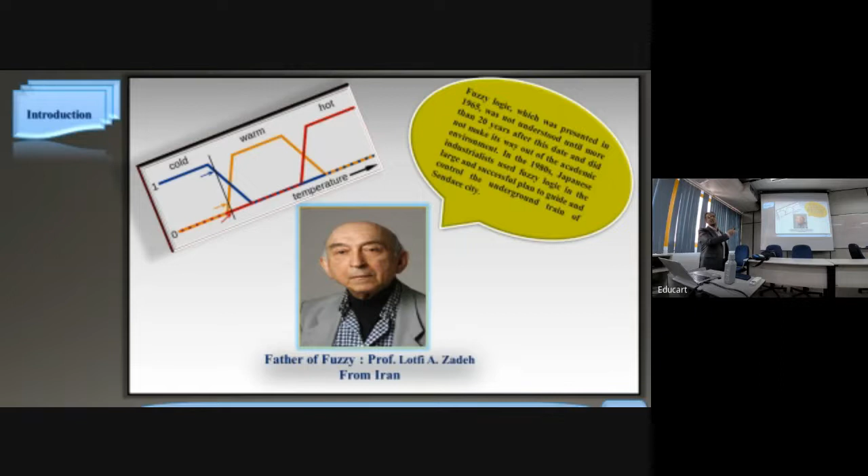Of course, nowadays fuzzy has developed - it goes to fuzzy type 2, fuzzy type 3, and they work with training algorithms. But this is the first background. If you don't have this background of what fuzzy is, you cannot go ahead.

If we want a simple introduction of fuzzy systems and why we are going to use adaptive fuzzy, it's important to understand why we left fuzzy, why we don't use fuzzy directly, and why we switch to adaptive fuzzy. What's the reason?

If you look at the history of fuzzy, in 1990 successful application of fuzzy logic increased in automated control. This was the first period that a revolution happened in intelligent controllers, because before that time all controllers were classic control, like sliding mode, backstepping, PI and PID. PI and PID still work in industry.

They have a lot of problems and people support them. But if we go through the details and consider nonlinear things, making the system linear and trying to design a controller nowadays is not useful because there are a lot of nonlinear terms in your loop that you ignore if you want to design a linear system.

So it's not fair. Some researchers just defend PI and PID because it's easy to design and cheap to implement. But you ignore many things, and after designing the controller, these nonlinear terms that you ignore can make a problem for you. That's why we are switching to nonlinear.

From 1990, especially that time, devices and industrial equipment became complicated in terms of mathematics. If you look at the models of new devices, they are highly complicated. That's why we are looking for adaptive methods.

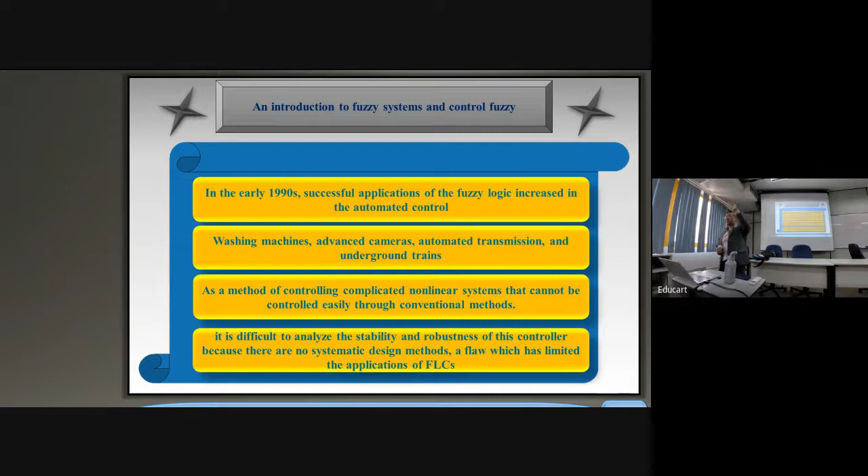The problem with fuzzy is that it doesn't have a mathematics background, so we cannot always prove stability if you use pure fuzzy. Because if we define pure fuzzy, you need to manually design the membership function, and training this membership function is important. So this is the problem of fuzzy: you cannot prove stability with pure fuzzy. That's why we mix it with adaptive to become adaptive fuzzy control.

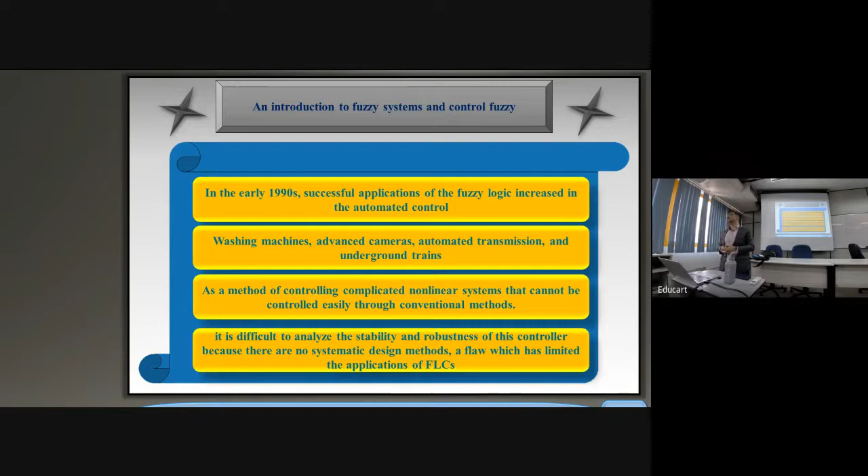Of course, fuzzy has other applications like classification. We can classify different things. We can design an observer, we can design a controller, we can design an estimator, and each one has its own application.

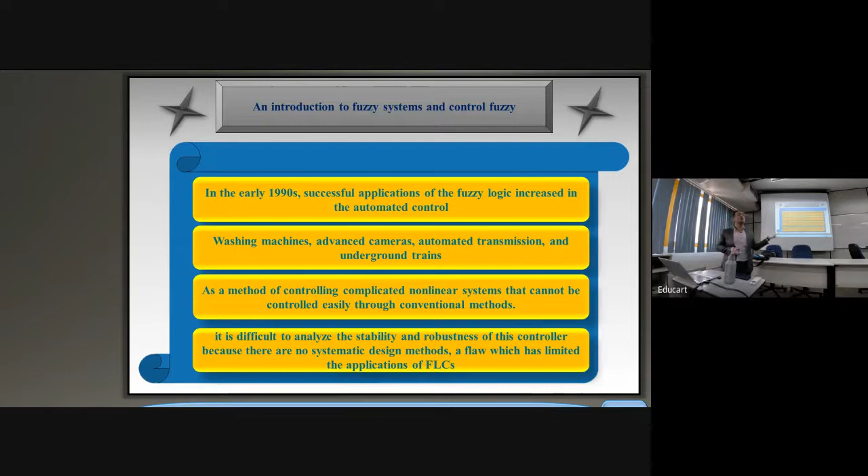But the main reason we switch from fuzzy to adaptive fuzzy in controllers or observers is to prove stability. When you design your controller, you need to prove the closed loop system is stable, and we have different types of stability, not just one type.

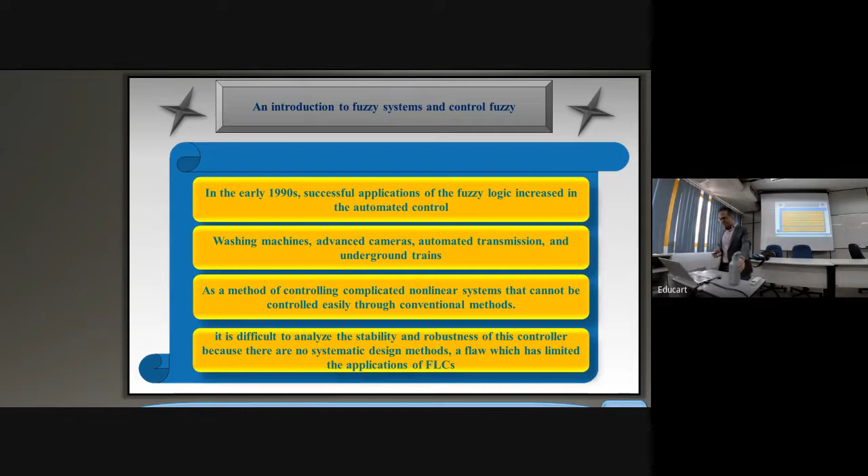This is the reason I first introduce adaptive control. You know adaptive control developed after World War II. Maybe during the war, adaptive control became silent among researchers because of politics, I don't know, but after that it tried to develop fast.

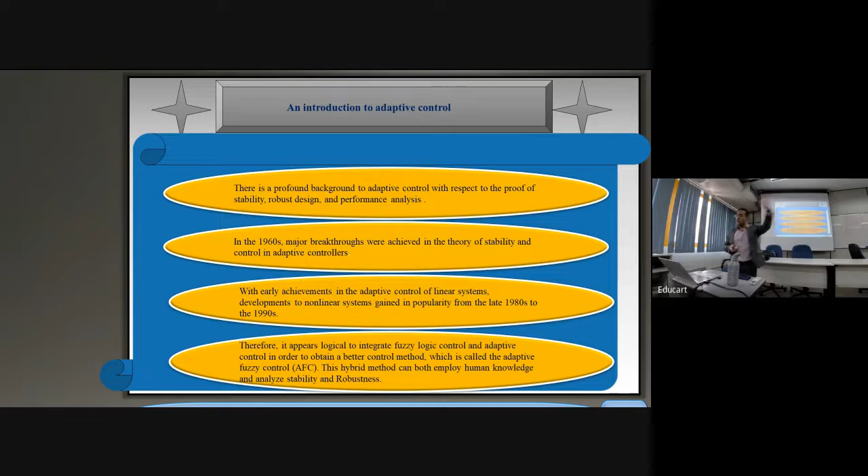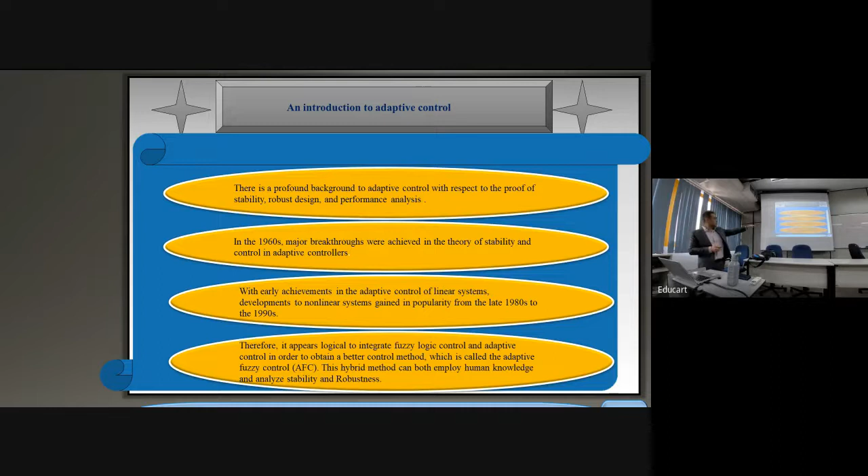Many papers came from Russia, from America, different countries, Brazil. They tried to develop adaptive control fast, especially in 1990. And we mix fuzzy control with adaptive control, calling it adaptive fuzzy, to have the properties of fuzzy to solve

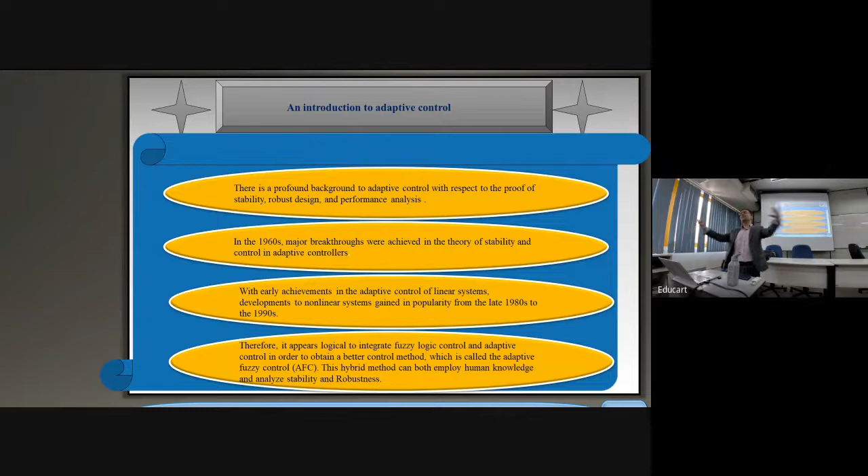complicated systems that we cannot control by classical methods, and also use the stability that comes from adaptive, mixing them together and calling it adaptive fuzzy. So these are the main properties of adaptive fuzzy controllers: we can design a new controller for complicated systems, and we can prove their stability.

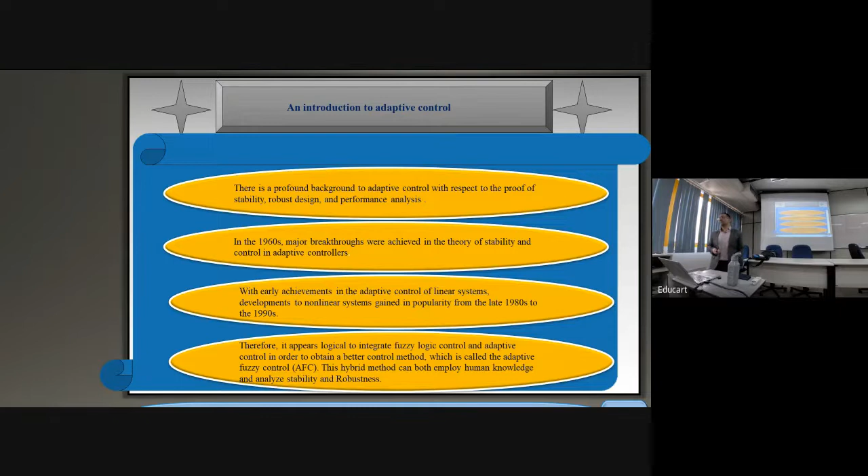According to the explanation for training the membership function of fuzzy that I discussed, we have many ways to do this. We can use neural networks, we can use Kalman filter, we can use different ways, we can use genetic algorithm to train these membership functions based on our system.

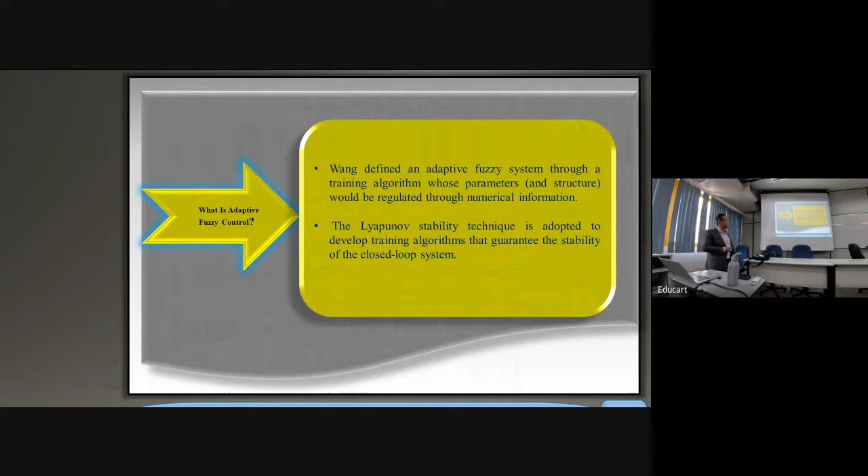As you know, Wang defined it. Wang was the first person to write a book about fuzzy control. We say an adaptive fuzzy system has a training algorithm whose parameters and structure are regulated through numerical information. By some information from the system that you have, you can train the fuzzy system, and after that you can prove its stability. So we call it adaptive fuzzy control.

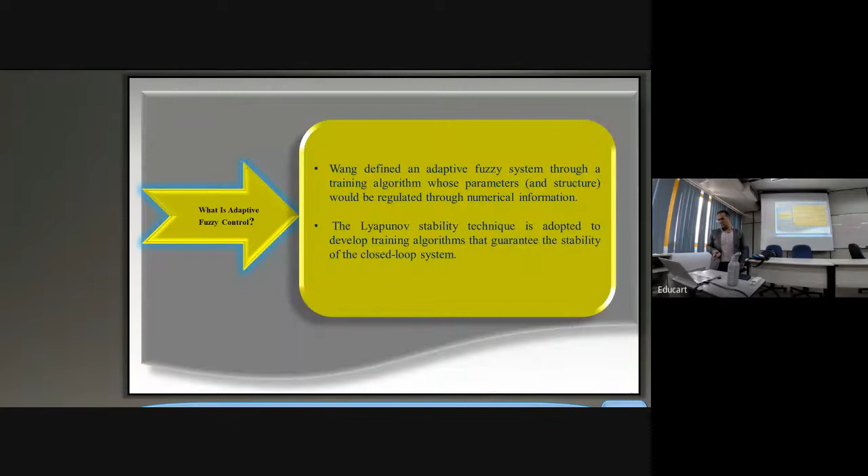So what are the properties of adaptive fuzzy control? First, adaptive fuzzy systems are good nonlinear general estimators. As I mentioned, many nonlinear systems cannot, or it's very difficult to, use classical control for.

For example, in the next slide, I will show you chaotic systems. Chaotic systems are very complicated. If you want to define them with sliding mode, it's impossible or difficult, and you have problems like chattering. Backstepping, when you go through the steps, it's very difficult. PI control, impossible, it can never do it.

So this is a very good nonlinear general estimator. Fuzzy control is easy to implement. This is another important part of fuzzy control, that we can implement a fuzzy controller, because with some other nonlinear controllers, when you design them, implementation is impossible or very expensive.

For example, why is PI and PID still working in some projects? Because they are cheap. When you want to implement a controller, it's cheap and easy. But why don't we switch practically from PI to sliding mode, or from PI to feedback linearization?

Because it's expensive to implement. There's a VLSI IC that can be designed for this complicated equation, but it's too expensive. That's why researchers, especially in industry where economics is very important, still work with PI and PID.

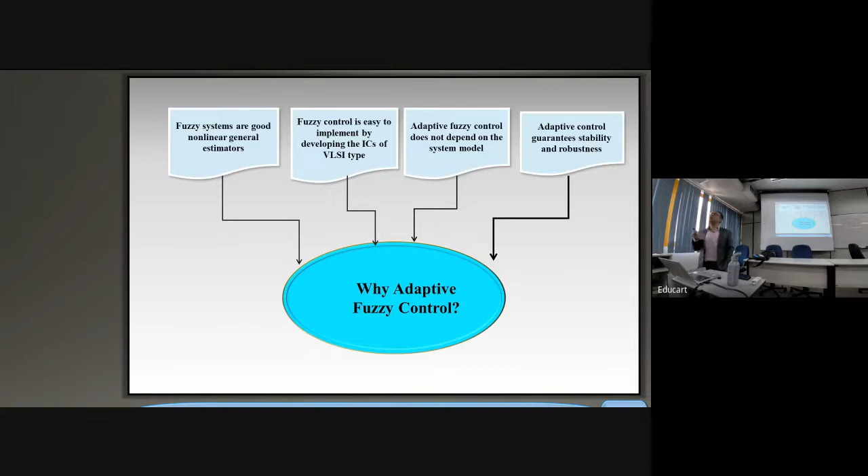If I want to classify adaptive fuzzy control, you can classify it into two parts: direct and indirect. What's the difference? Direct means you directly design the controller, for example a sliding mode adaptive fuzzy controller, directly designed by some algorithm or method. It has its own problems.

But what is indirect adaptive fuzzy control? First, you estimate the dynamics of the system, whether you know the dynamics or not. First you estimate it, then give it to another controller. So the controller design is based on the dynamics you estimated by fuzzy. We call it an adaptive fuzzy controller.

Most of my work is categorized in this part. I work with indirect adaptive fuzzy controllers because proving stability, sometimes finding the Lyapunov function, is difficult when you go with direct adaptive fuzzy control, and there are other issues. So if you see in a paper 'direct' and 'indirect', this is the difference between them.

Directly you use some algorithm and method, but indirect means first you estimate the model, then give it to another controller. The controller can be any controller because you have the exact model of the system.

The properties of this controller compared to classical ones: you don't need the exact model of the system. Because having the exact model is sometimes impossible. For example, an airplane moving, or a missile going into space. The model is difficult to estimate because, for example, as the missile goes into space, its mass is changing. But do you have a sensor to measure the mass? It's very expensive or impossible.

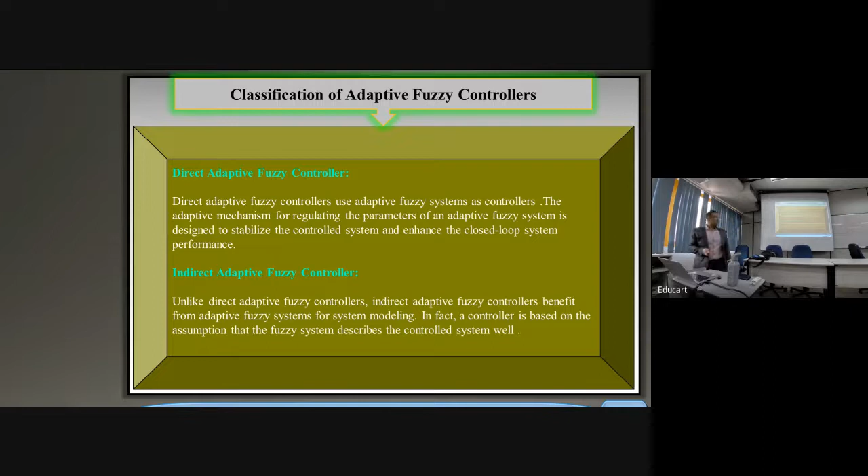Sometimes in some papers you can see researchers mix other controllers with fuzzy control. I put this aside for you, especially for students, to say something that might be useful for you.

When we are going to design the controller, first we need to see what are the properties of the controller, and what problem you're going to solve. Some people just change the controller. For example, when I ask them why they changed backstepping to feedback linearization...

For example, in converters, DC-DC converters, you're going to design a controller. Other researchers work with backstepping. Okay, I see this researcher works with feedback linearization.

When I ask the reason: when you design a new controller, you need to solve some problem. Otherwise, other controllers have done it. In engineering, we don't want to make things complicated, because we want to have implementation. We need to make them simple, right? So you need to know what properties every controller has. What are the properties of this controller, and what problem are you going to solve?

If you switch from backstepping to feedback linearization, you need to have a reason for that, or a background for that, not just changing. Of course, if you change, you will get a result. Even if the result is the same or similar, it can be accepted in a journal. Not a high-level journal, but a medium journal, because reviewers look at your work: okay, it's another new controller, but you didn't add any novelty in your work, right? So this is very important.

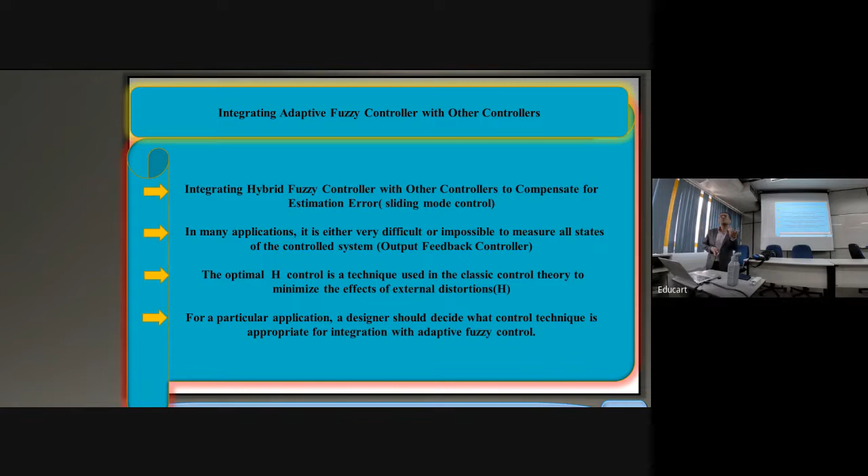For example, H-infinity, that they were working on. Why do some people use it in converters? Because it minimizes the effect of external disturbances, and you have a lot of those in your converters. Okay, so know the system very well, know the properties of the system very well, know the controller very well, then design the controller for them. Then choose the correct controller. This is the way, at least, that I do my research. This is another example, so I jump fast.

So after finishing this seminar, whatever system you work on, you can go to papers. You can see that the researcher definitely defined the mathematical model of the system. You can compare which category it fits into, and then go to the controller that you're going to design. See whether the controller is suitable for each dynamic. Okay, so this is another perspective on the controller that we need to know.

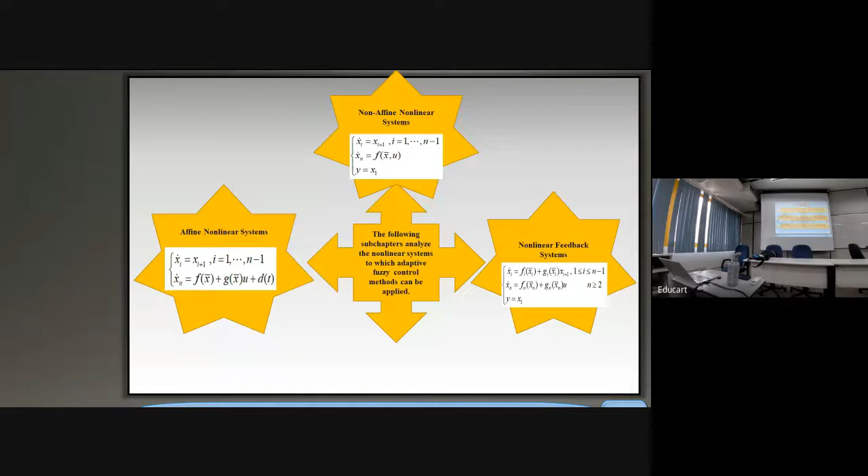Another type of fuzzy system is the type 2 fuzzy system. The type 2 fuzzy system is the new fuzzy system. I work with fuzzy type 2. What is the difference with fuzzy type 2? I'll jump through this PPT quickly because maybe it's not your expertise, and I just want to give you the overview. The first reason that we jump from fuzzy type 1 to fuzzy type 2 is that fuzzy type 2 has more capability; it is stronger at estimating the dynamics of the system. So that's why we are using fuzzy type 2 systems and switching from fuzzy type 1 to fuzzy type 2.

If you read the old books, they just focus on fuzzy type 1. But fuzzy type 1 is finished, it's done. And they are going to fuzzy type 2. And after fuzzy type 2, I work with fuzzy type 3. We improve the fuzzy. Why? Because systems become more complicated. Okay? So if you want to start working with fuzzy, you need to start with fuzzy type 1, then switch to fuzzy type 2. And what is the benefit of fuzzy type 2 compared to fuzzy type 1? Just the capability to estimate the uncertainties.

What are uncertainties? What is uncertainty? Who can give me an explanation about uncertainty? For example, in converters, or any system in robotics, what is uncertainty? Noise. It can be noise. Noise is a kind of uncertainty, but it's categorized as noise, in disturbances. Uncertainties are parameters that change during working. For example, in an induction machine, when it starts working, some parameters change, like the resistance of the rotor, right? Because of the skin effect. The rotor has a skin effect. The resistance starts changing during the work.

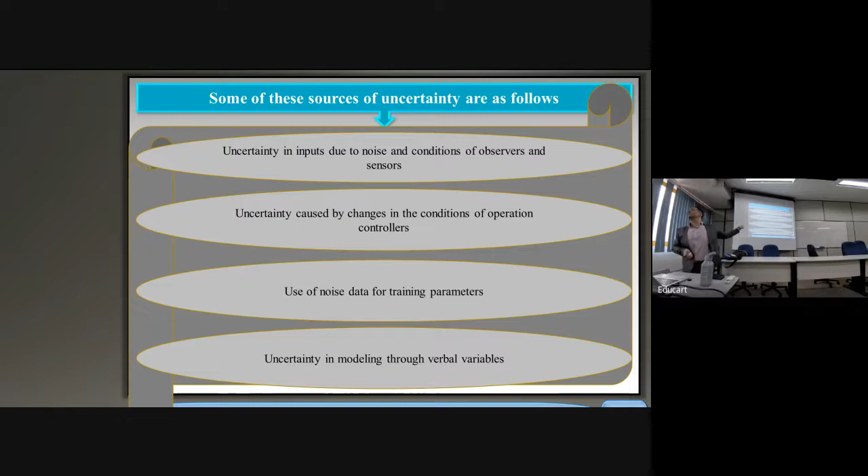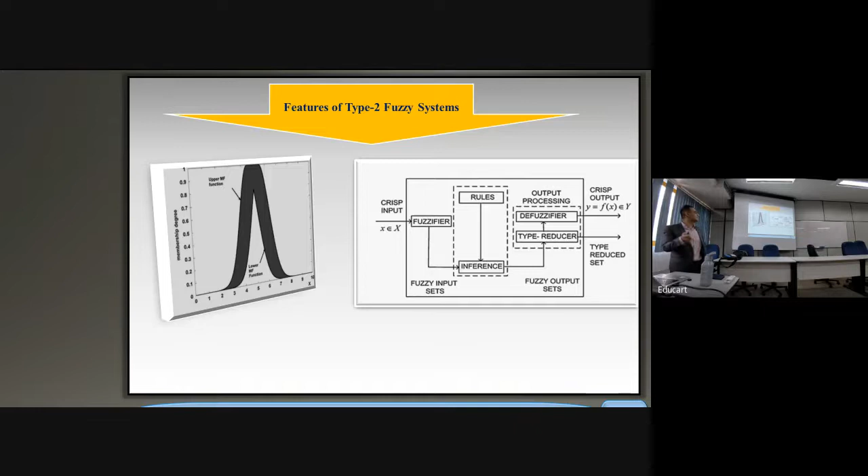This is the general perspective of fuzzy. At the beginning you have the crisp. These crisp values are numbers, so you make them fuzzy by a membership function. Then you implement some rules on the fuzzy based on your design. When you implement some rules on the fuzzy, then you need to again make them numbers. All of these steps need designing; this just gives you the general perspective. And after that, your controller is ready and can act in every application that you consider for fuzzy.

So for the example, I want to give you the first example that I worked on in BYD company, the induction motor. I want to show you how I designed the adaptive controller for the induction motor. I pass the slides quickly because of the lack of time, and I don't want this presentation to become boring for you because maybe you're not too much a specialist in terms of control. I want to show you the example and give you the overview.

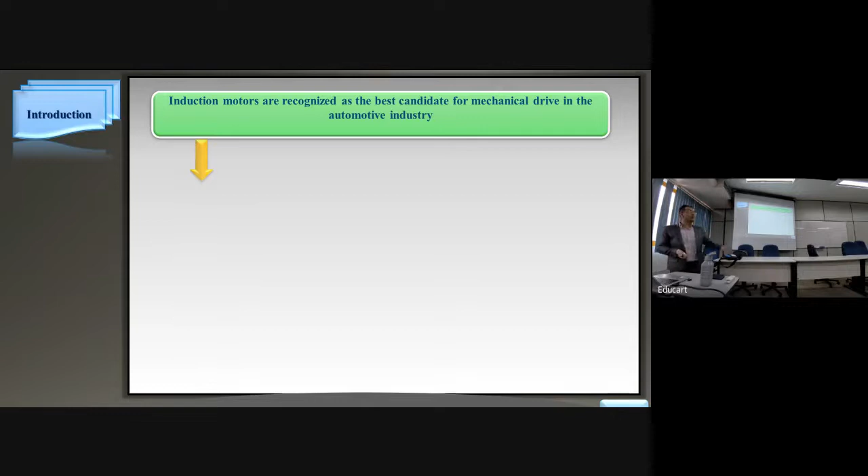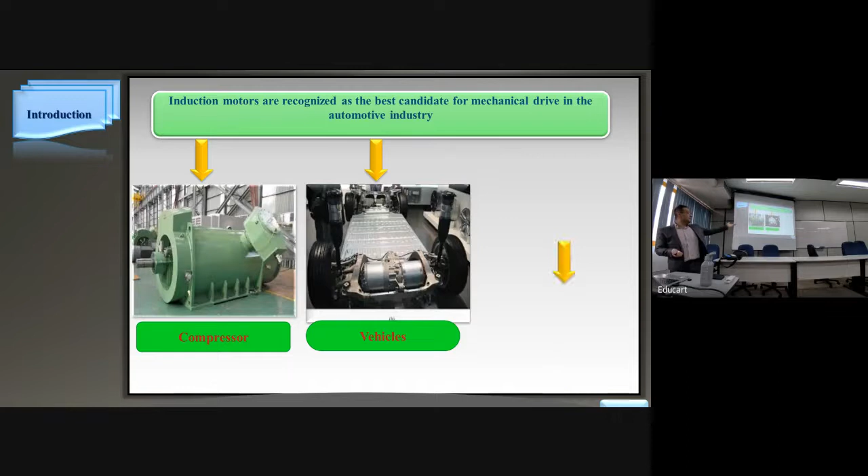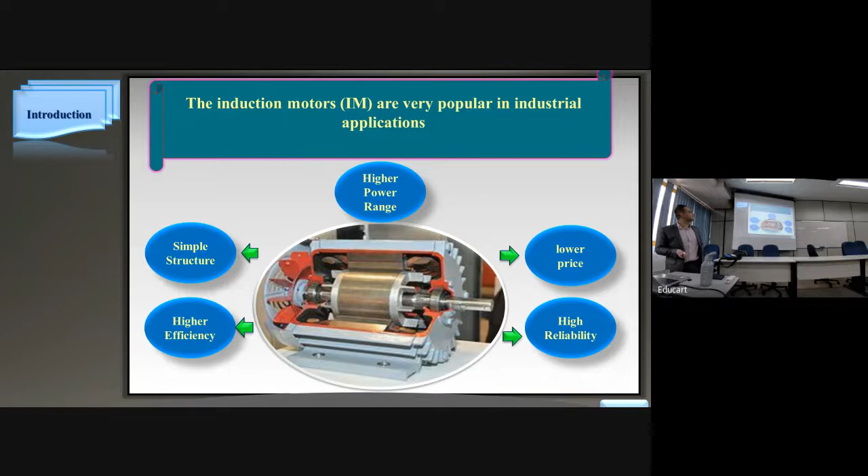So the induction machine, as you know, has a lot of applications in industry, especially nowadays in vehicles. In vehicles, BYD uses the induction motor because of its properties. It is a trustable motor; it can endure different kinds of working conditions. So it's a trustable machine for us. So in industry, it's a very important machine, but the problem that we found in the induction motor is, let me show you the challenges that we found first. First challenge

that I found: most of the previous works depend on the accuracy of the mathematical model of the system. When you look at the mathematical model, most papers refer to some other papers. But originally, when this mathematical model came out, maybe it came from some identification or from some other researchers. But it's never exact. It doesn't have accuracy because it's impossible. When you have the mathematical model of the system, it just describes your system. It doesn't have accuracy.

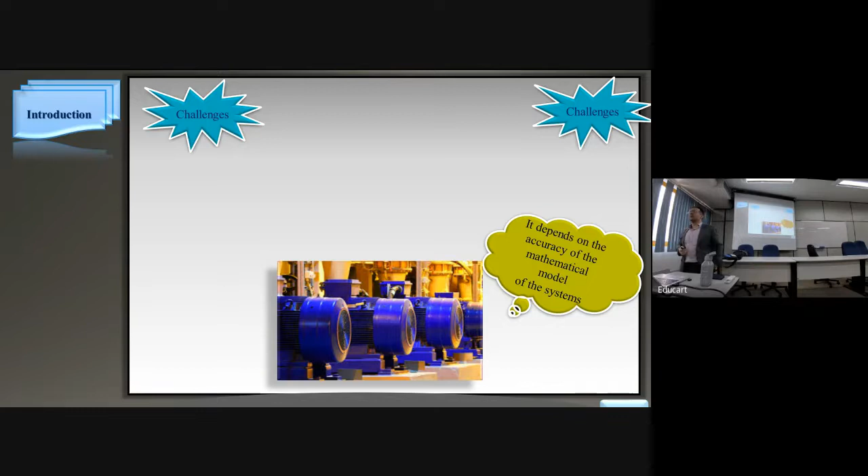And when you design a classical controller, you design it exactly based on the mathematical model. So if the mathematical model is not accurate, all your design is wrong. Of course, it can act similarly, but it becomes wrong after a while, right? So this is the first challenge. Second challenge: finding disturbances, noise, and especially faults.

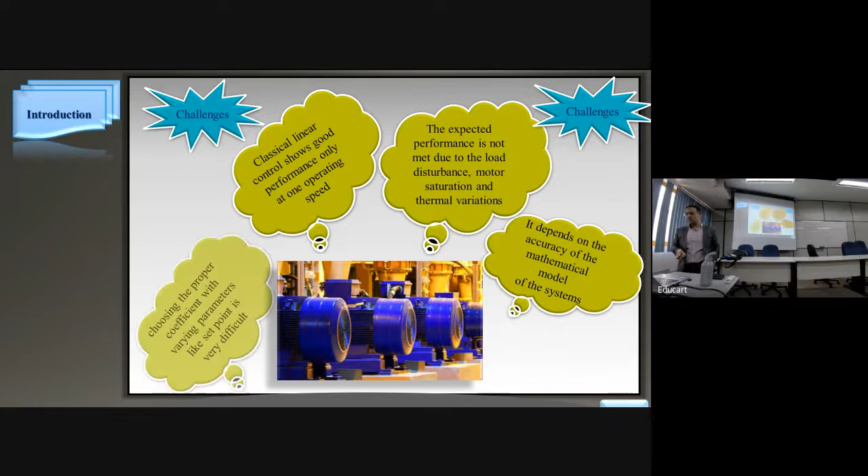Another key issue that I want to mention in this seminar is that many researchers, when they design a controller, don't consider the faulty operation of the system, just the normal operation. Of course, in normal operation, a key can control the induction motor too. By a contactor, by a simple key, you can control it because nothing happens. You need to consider the faulty condition. When you have noise, uncertainty, and disturbances, you need to look at which part has all of these together. So it's very important. So that's the challenge to be found.

Another system that I worked on, as I mentioned, was chaotic systems. What is a chaotic system? First, let me quickly introduce chaos systems. From a mathematics perspective, a chaos system is highly nonlinear, totally nonlinear. Maybe we can say the first nonlinear system is the chaos system. Industrial systems can act chaotically; they can have chaotic behavior, especially converters. Power electronic devices act chaotically.

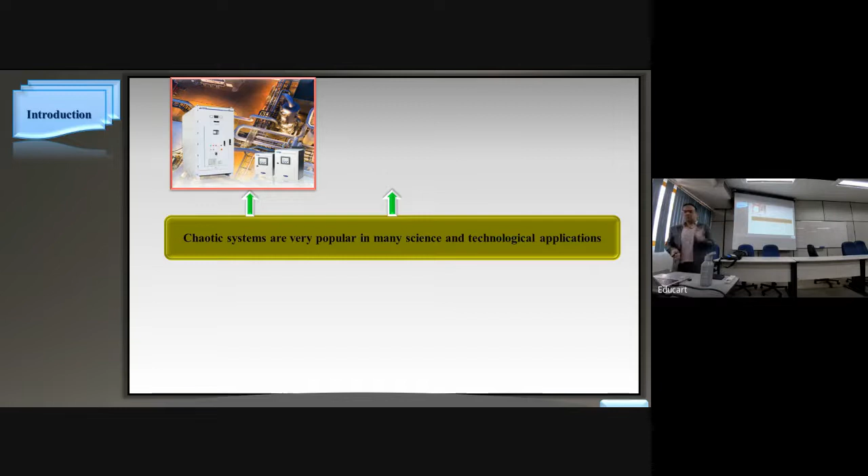Why don't we find many papers on the internet? Because it's difficult to design a controller, and some people leave it. They go through relay protection or other ways to control the chaotic behavior. So it's very important that we consider chaotic systems. Many systems act chaotically. They're highly nonlinear and sensitive to the initial condition of the system, which is very important mathematically. When you start the system, it depends on this. And they have unpredictable behavior; you cannot even guess the behavior. So it's very difficult to design control the classical way.

COVID-19 is kind of the chaos system for the economy. It makes the economy chaotic. Can you predict what the economy of the world will be in 6 months when we have COVID? No. No one can do it.

But I saw in Michigan, United States, they try to design economic systems based on COVID. They put the COVID dynamic into the economic system of the USA, and they try to design the controller for the economy, because the economy is one of the important parts in control. How can we control the economy? By this chaotic behavior.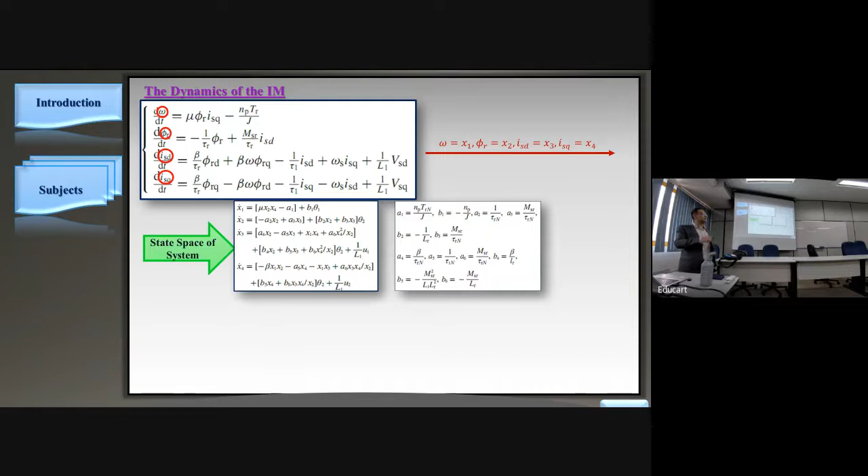The first work for the induction motor was the I&I controller that I did in BYD company. I just want to show you the novelty that we consider in this work and give you the perspective. We consider two faults of the induction machine. First, change in rotor resistance, because rotor resistance starts changing during the work. And second, change in load torque. We have different types of variable torque.

Okay, suddenly overload comes to the shaft, suddenly it's taken out. So we consider these two as a challenge. What is the novelty of this work? We consider them as theta 1 and theta 2 in the dynamic of the induction machine. The mathematical dynamic that I was explaining is this, the dynamic of the IM. I told you, it should be accurate if you want to design classical control, but sometimes it's not. Different papers consider different types of dynamics of the induction machine. Which one has more accuracy? We don't know, because they use different types of identification.

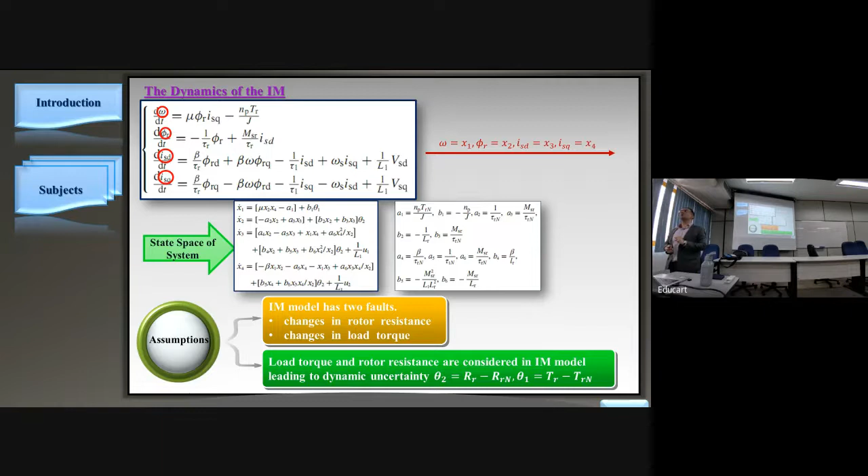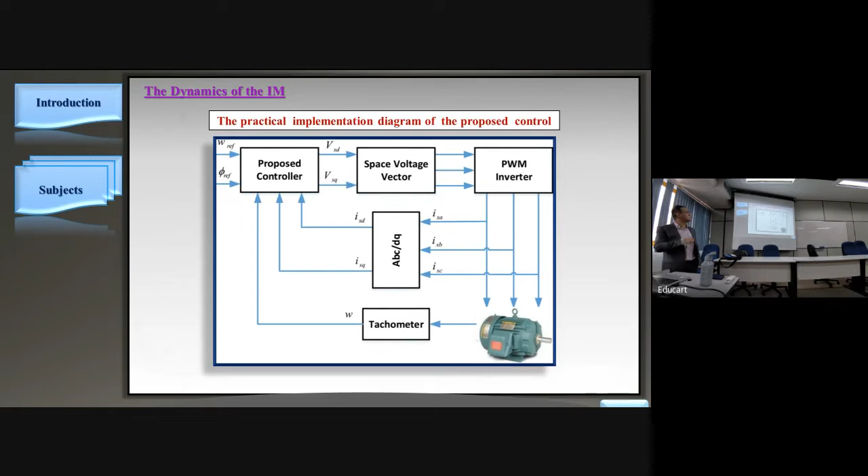So here we try to consider theta 1 and theta 2 inside the dynamic. When we put them inside the dynamic, it becomes an adaptive controller that estimates them online, time by time. So the controller becomes robust and adaptive together. Of course, these are the steps that we took. I don't want to get focused on them, I just want to show you the results. This is the overview perspective. Here is the proposed controller. And these are the properties of the induction motor, as you can see.

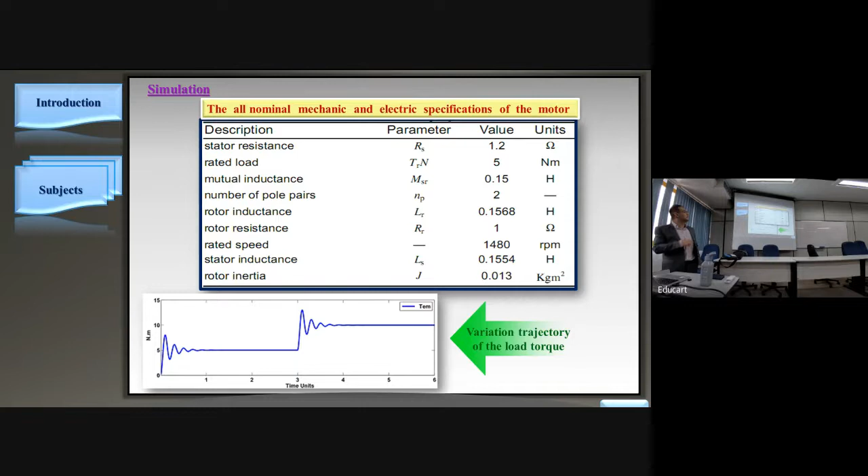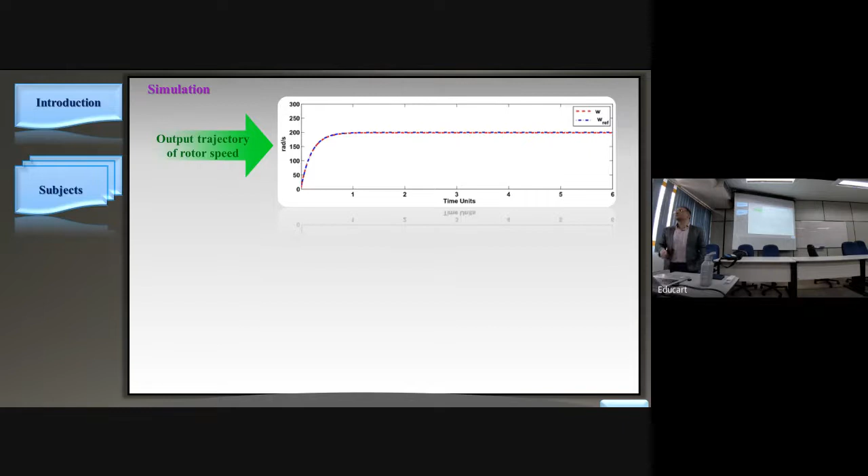And this is the variation trajectory of load torque. The load can start varying. Suddenly here we have the overload, and of course the overload with variation. And this is our result. You can see the reference and tracking during fault and normal work of the induction motor. With these two faults, the motor continues working. Trajectory of rotor speed and trajectory of rotor flux: both of them work, smooth and without any fluctuation.

Another important part of control that you need to focus on when you design a controller is control signals. If you design the controller and the control signal is not smooth, you cannot implement it, and it's very expensive for implementation. So having a smooth control signal is another thing that you need to pay attention to. For example,

I saw a paper, it's a personal experience to share with you, where they designed a controller, I think it was for robotics, but the control signal had a lot of fluctuation and it was not acceptable. If you ask a specialist in mechanical engineering and mechatronics whether this control signal can be accepted for your system, she or he will say no, not at all, because this controller cannot be implemented. Your designed controller works, but the control signal is very important. So when you want to get results, you need to pay attention to your control signal.

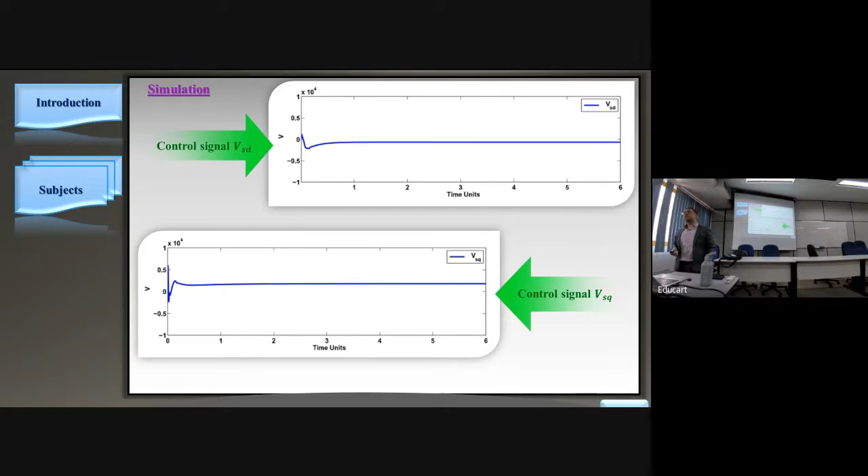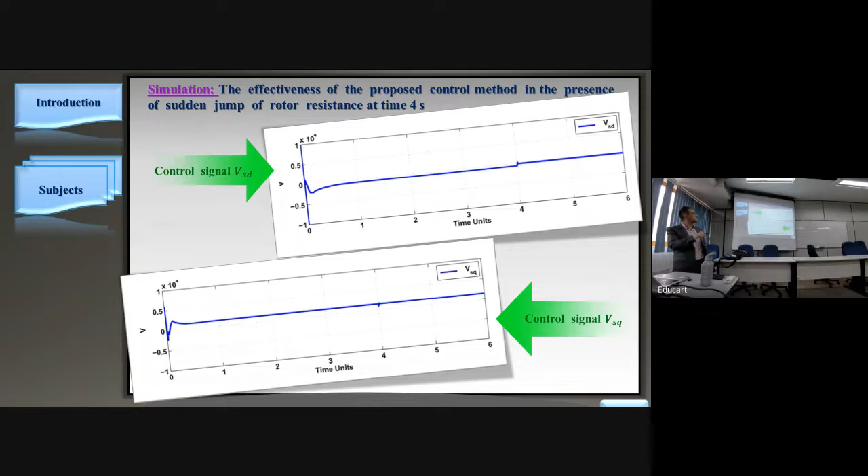What is a control signal? The signal produced and given to the actuator. It's very important. So these are the results that we consider. This is the faulty condition of the machine. As you can see, the signals are still smooth. We don't have any fluctuation. I'll just go past to show you. Control signals are smooth. There is no specific fluctuation, just here, but the controller can endure, because nowadays they are implementing this controller in BYD company. And this is the comparison with other works.

This is another thing that I want to focus on, and unfortunately, some people don't pay attention to this. As I explained at the beginning, when you design your controller, observer, or estimator, you need to be able to compare your work with other works. Some people don't have it in their thesis, in their paper, and in their work. How do you want to show you have novelty? How do you want to prove you have novelty?

Some researchers say, oh, I have a similar controller, a simple controller, with better results. So you cannot defend yourself. It's very important to put comparison in your work. As you can see here, we put comparison with different types of controller by RMSE. What is RMSE? The error.

The error in tracking. We calculate the error of tracking and we put it with different types of control. And you can see the error in my controller is much less than other controllers. So this paper, at that time, was excellent. It's very important you compare your work.

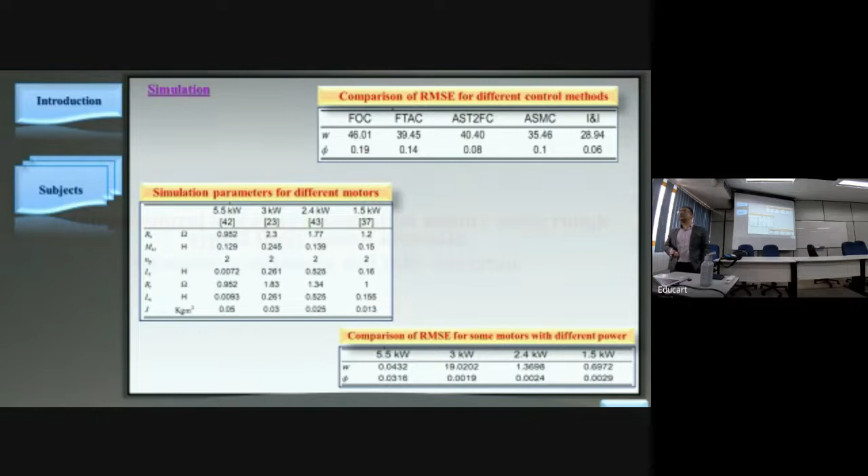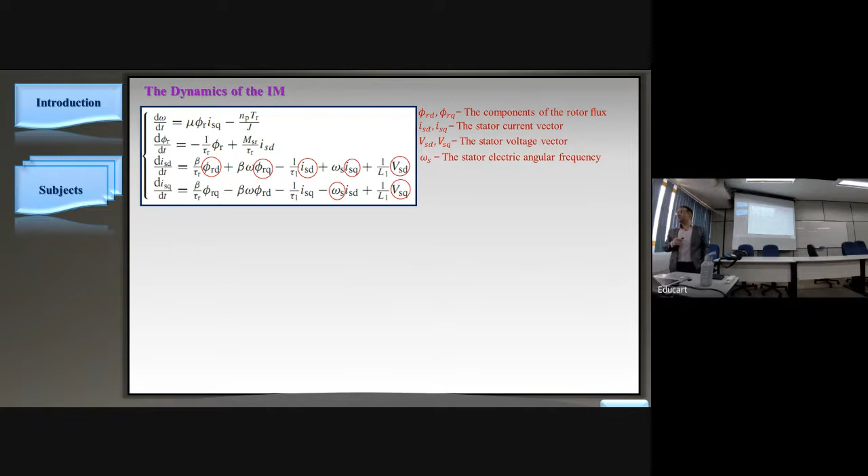Another work that we did with induction machine is the same condition, but in this work, we didn't consider we have the dynamic of the system. In this work, we don't have any information about this dynamic. We consider it like a black box. You don't know what's inside and what is changing. How do we design this controller?

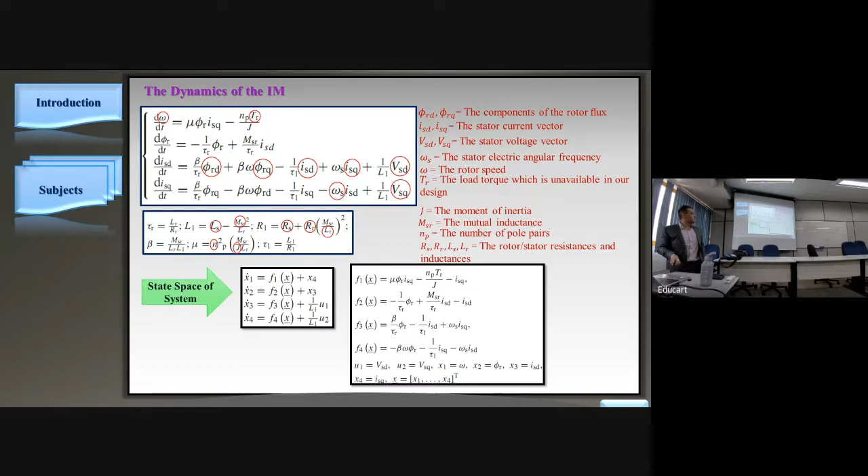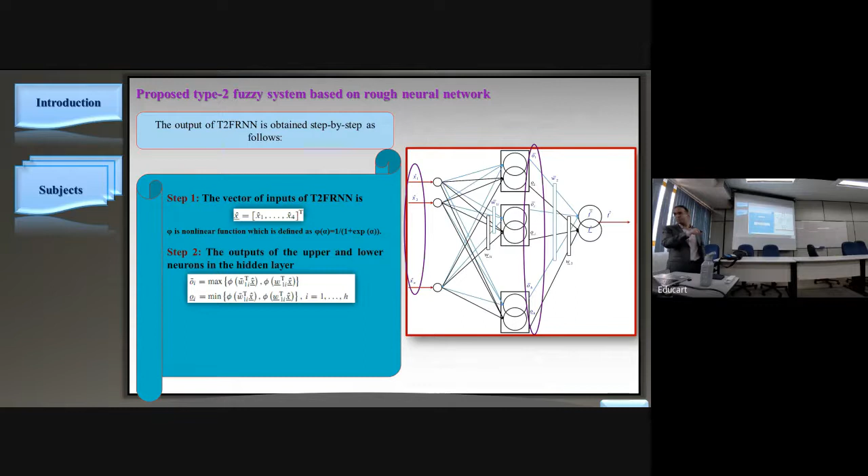By using the fuzzy perspective, employing fuzzy type 2. As you can see here, we have fuzzy. And we train the membership of this fuzzy by neural networks, and the controller design. And we prove their stability. First, I design the fuzzy controller, estimate the dynamic, then I give it to the controller. I will show you. Look here.

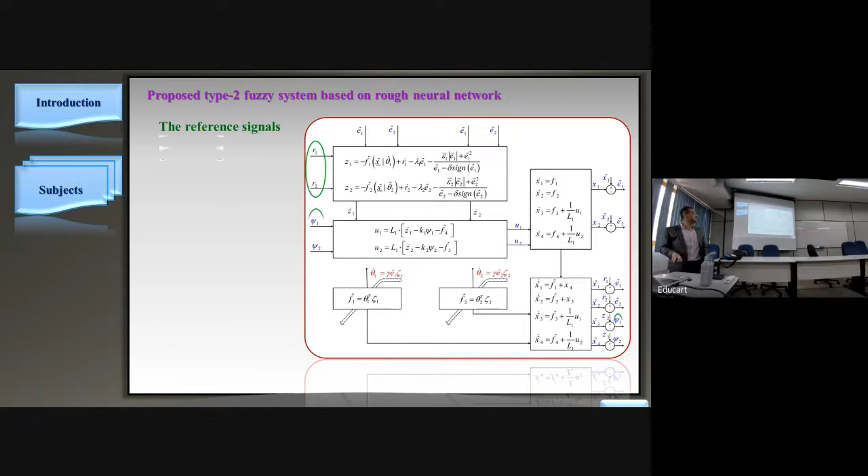First, we design the fuzzy. Here is the system. We use the fuzzy. We estimate the dynamic of the system. Then we give it to the controller. Indirect fuzzy system. Here is your system. First, estimate the dynamic of the system because I don't have any knowledge about the dynamic. Then I give this estimate to the controller. And let's see the result. This is indirect fuzzy type 2.

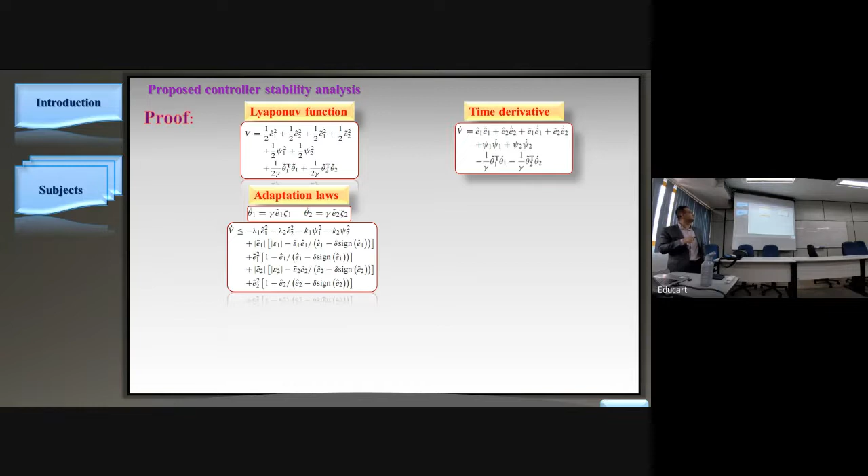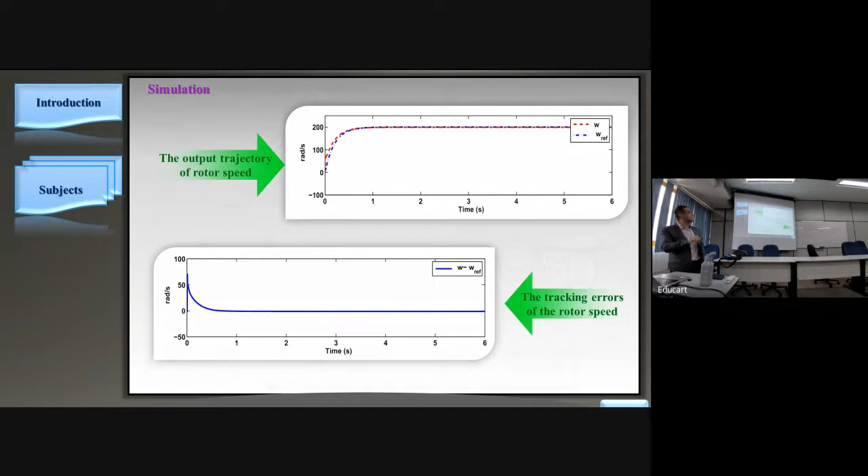So prove their stability. As I told you, adaptive fuzzy, we need to mix with some mathematics here by choosing this Lyapunov function. We prove their stability, and the result is, you can see the result. This is the output trajectory of rotor speed. Tracking happens, and tracking error is nothing. We don't have any tracking error.

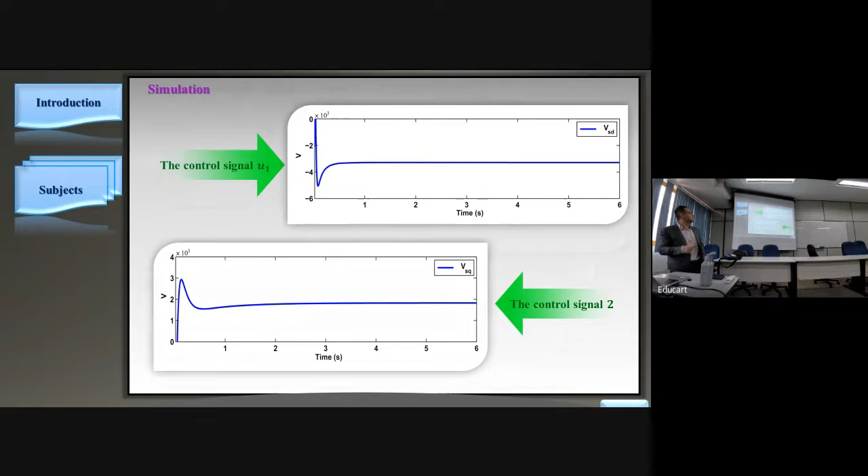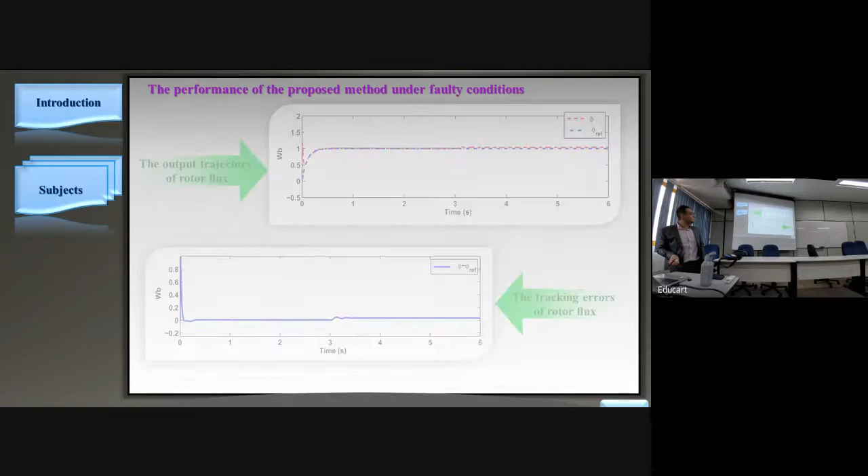And here, again, in faulty condition. Control signals are smooth. Just a few overshoots we have here, that is nothing compared to implementation in other works. And in faulty condition, also we have good results. So this is the comparison, as I mentioned before, and also with other fuzzy types. Comparison between fuzzy, different controllers, and different systems. You can do both of them in your works.

For example, you have a DC converter, you design a new controller for that. You need to compare this controller with previous works, or you need to change your system. Controller to controller or controller to system. It's very important to have in your work.

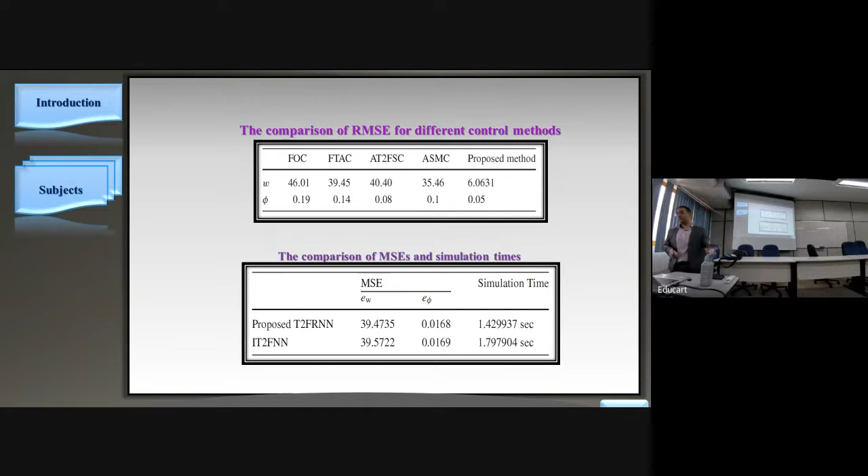So I'm going to finish my presentation now because my target in this seminar was to give you an overview and good perspective about control. I hope in the next seminar we are going to go into more details, and I will present for you the chaotic controller. So what is a chaotic system, and how we can consider some industrial systems as chaotic systems, and design controllers for them.